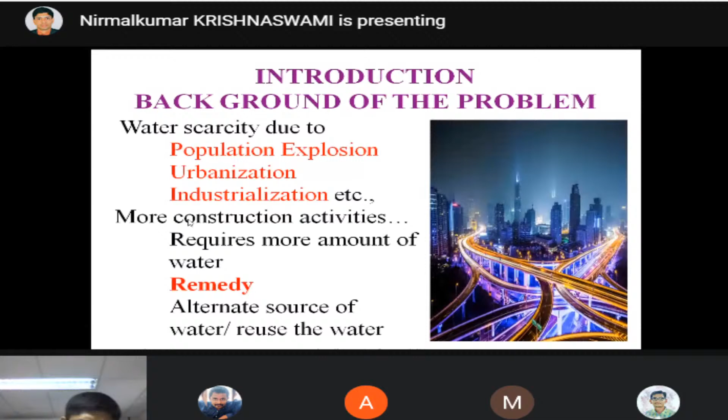So the only remedy is we have to go for reuse of water. For reuse of water, I considered various effluents: tannery effluent, textile effluent, effluent from rice mills, wastewater from milk industry, dairy industry, and wastewater from food industry.

I tried all this wastewater, and in our area, very near my place, that is Erode and Perundurai, we have more number of tannery and textile processing units. So it is easy for us to collect these effluents for our experimental research work. So I decided to collect the tannery and textile effluent from the nearby SIPCOT.

Those who know the geographical location of Erode will know the position of SIPCOT, which is very adjacent to our institute. In SIPCOT there are more tannery and textile processing units, so I decided to take the effluent coming out treated from the industry and use it for construction. This is the main reason I chose this tannery and textile effluent.

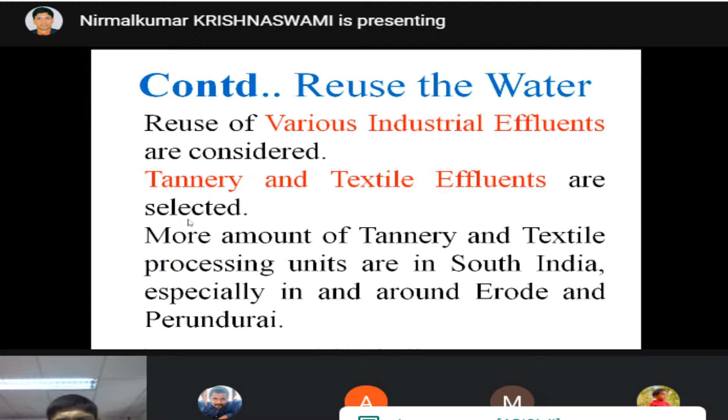Similar work was done by Marchand et al., Omar et al., then Woo-Yong Jung et al. — this third person, a Chinese researcher, worked on wastewater taken from the municipality. Then Olivier Poupard also used wastewater from the municipality. Omar et al., Saricimen et al., Al-Harthy et al. — these people, shown in violet color, used wastewater or waste coming from refineries.

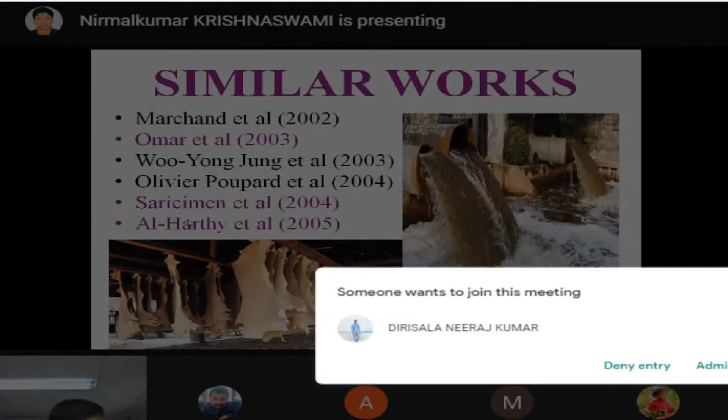These people belong to Saudi Arabia, and as you know, Saudi Arabia has more refineries. So they took the wastewater coming out of those refineries and used it for construction, and proved it to be successful. I did the same thing: instead of using potable water, I replaced it with tannery effluent and textile effluent. This is the background for why I chose the tannery and textile effluent.

Is my presentation normal, or am I too fast or too slow, Murthy? Sir, normal, sir. Normal. Can I proceed further? Yes, sir, you can proceed.

Somebody is saying the voice is not audible. Sometimes it will break, sir. Yeah, a few people said it's normal. Okay, I think I can proceed then. For most of the people, it is okay.

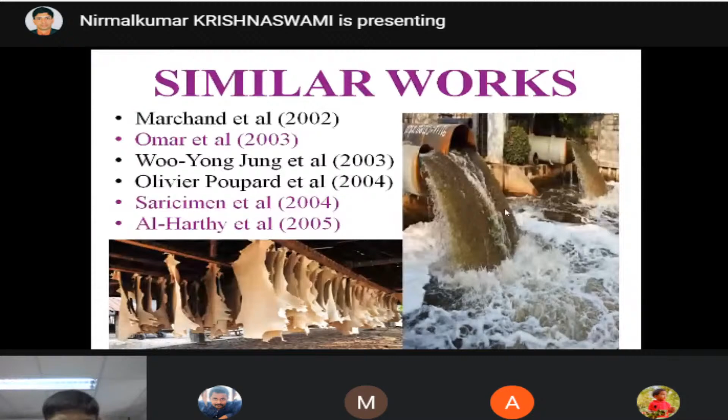This is the process I followed before carrying out the experiments, and this shows my methodology. I analyzed the characteristics of untreated and treated tannery effluent, and untreated and treated textile effluent. So four components are there: tannery effluent, two components, and textile effluent, two components. I studied the properties of concrete, both mechanical property as well as durability property.

If you see, mechanical property includes compressive strength, tensile strength, flexural strength; durability property includes sulfate attack, chloride attack, corrosion. I also studied a lot of other durability properties which will follow. Now, when doing this research, I faced a lot of problems. When compressive strength, tensile strength, flexural strength, bond strength experiments were carried out, mechanical property, absolutely there was no issue. But when coming to durability property—sulfate attack, corrosion, chloride—there were some issues. The weights were totally reduced and the strength was very, very less.

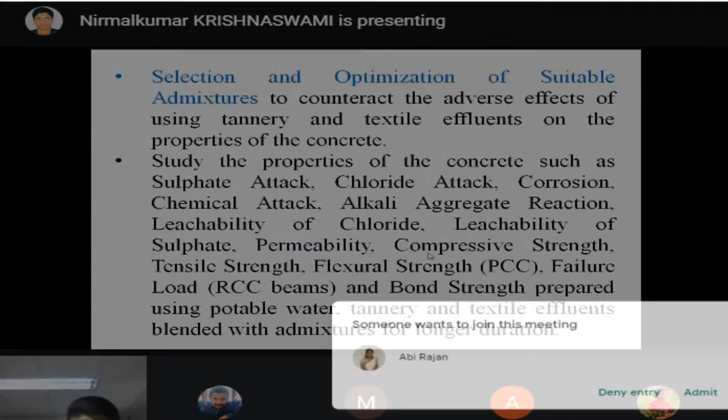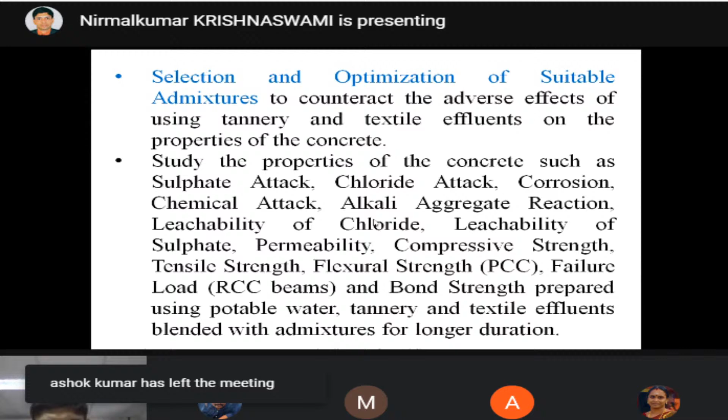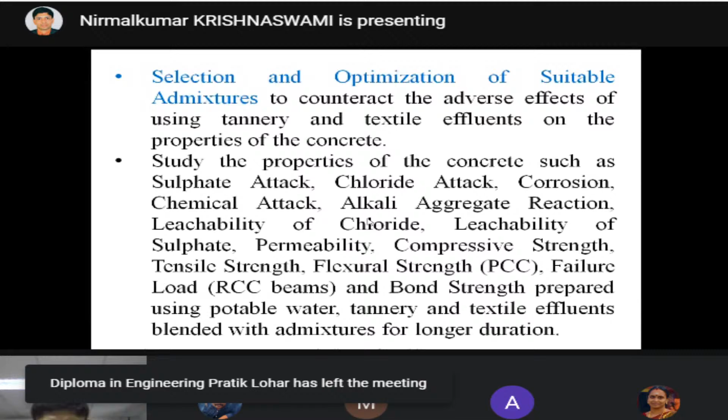So to counteract this, I used some chemicals, some admixtures. After adding the admixtures, I studied all the properties: sulfate attack, chloride attack, corrosion, chemical attack, alkali aggregate reaction, leachability of chloride and sulfate, permeability, compressive strength, tensile strength, etc. Around 13 to 14 experiments I carried out, and around 4,000 plus specimens I cast, broke and tested. I inferred a lot of information from these various tests.

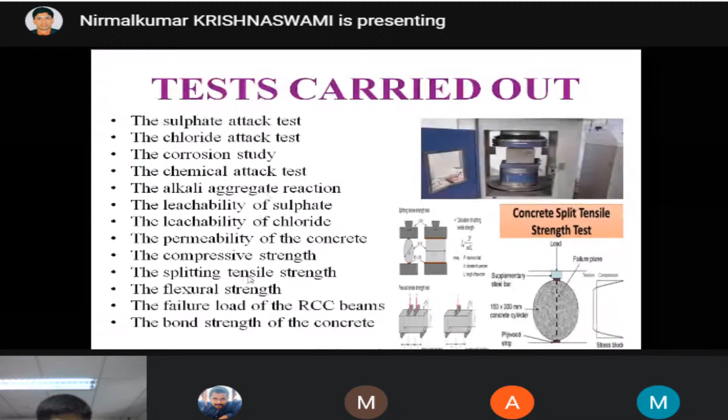Now, where did I collect all these effluents—tannery and textile effluents? I collected the tannery effluent from Meenakshi Leathers, SBMS Leathers, Taj Leathers, and the textile effluent from Thai International, KPR Textile Processors, etc. These are all the places where I collected the samples. I've also given this in pictorial form—these are all the various tests I carried out, around 13 tests.

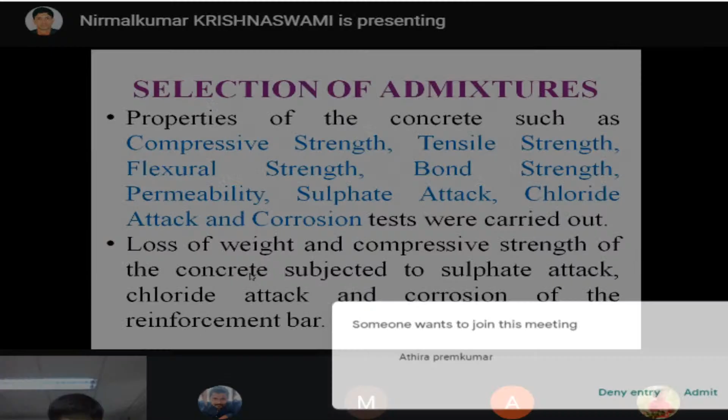Selection of admixtures for this particular area took around 6 to 9 months just to optimize, to select the admixtures and optimize the amount. While studying the properties, mechanical property had absolutely no issue. But when it comes to durability property—permeability, sulfate attack, chloride attack, corrosion—these play a major role, causing loss of weight and reduced compressive strength, and corrosion was aggravated.

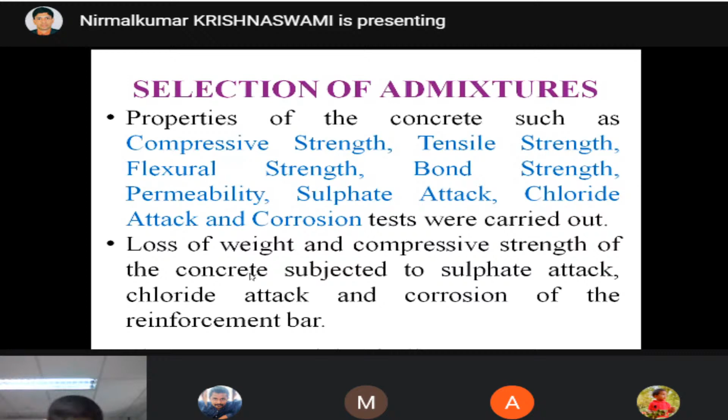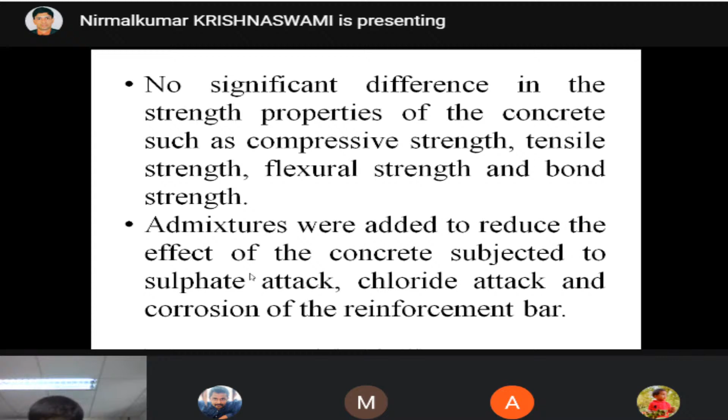So I selected the admixture and optimized it. There is no significant difference in the strength properties—compressive strength or flexural strength. But admixtures were added to reduce the effect on concrete subjected to sulfate attack, chloride attack and corrosion, and even acid attack is also subjected to some effects. For this, I carried out various trials—around 1,000 plus specimens for optimization, out of the total 4,000 plus specimens.

Finally, based on various trials and errors—not a single trial but around 40 to 44 trials—I decided and chosen: for tannery effluent, 5% fly ash with 2.5% Concar or 2% calcium nitrate. For textile effluent, it is 5% fly ash with 2% Concar or 2% calcium nitrate. So these are all the things I finally selected as the admixtures and the correct, right proportion.

After deciding this, I decided to prolong the test up to 2.5 years at various intervals: 28 days, 60 days, 90 days, 180 days, 365 days, 2 years, and 2.5 years.

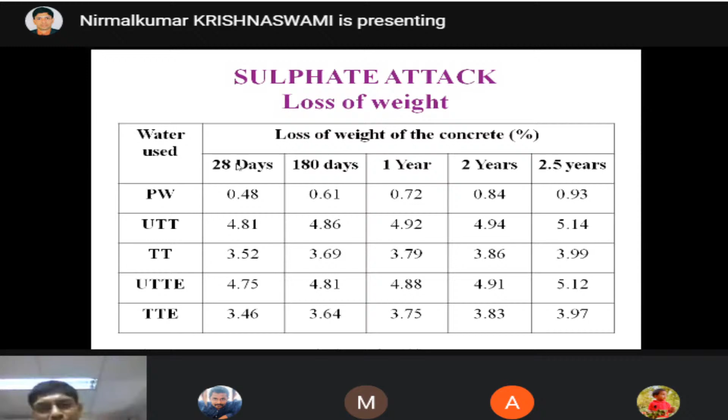Okay, now let us go to the chloride attack. Chloride attack, sodium chloride—I will be immersing the concrete cube in a 6% sodium chloride solution. After 28 days, I will take the cube, wipe it off and dry it, and then test it.

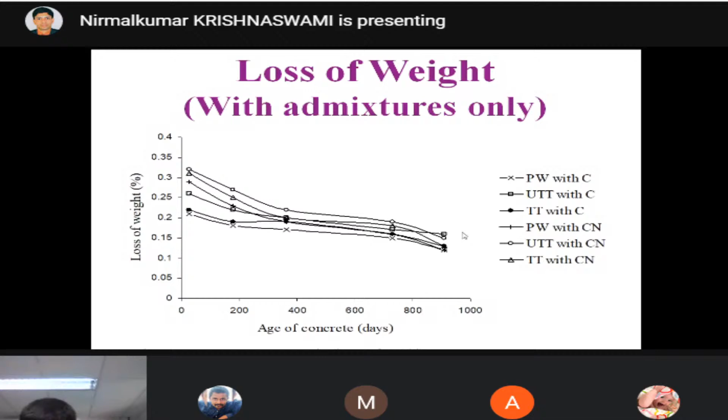If you see the graph for tannery effluent, it is less than 0.35 percentage. Even at the end of 2.5 years, it is further reduced to 0.2 percentage. This is particular for the tannery effluent.

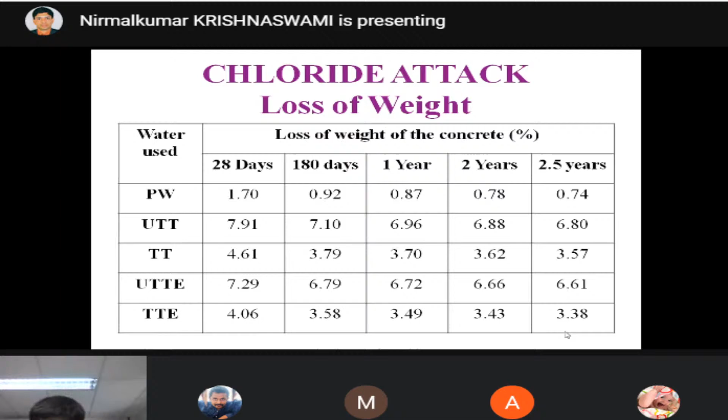Now this is for the textile effluent. In the table, textile effluent values are 7.29, 6.61, and 3.38. So for textile effluent, it is less than 0.3, even less than potable water.

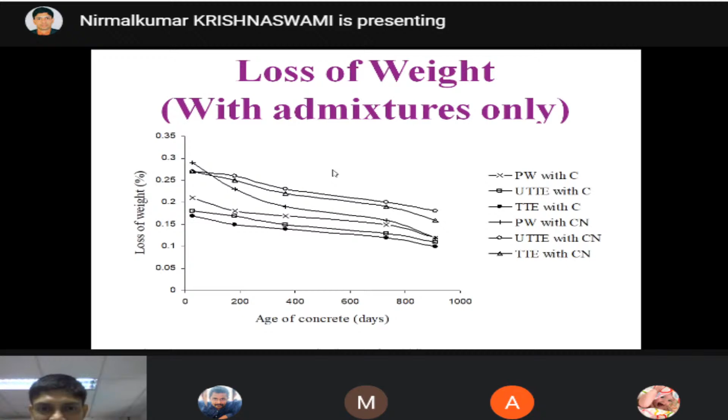This is as far as chloride attack is considered. After testing the loss of weight due to chloride attack, the same specimens were tested for compressive strength. So this compressive strength is our benchmark.

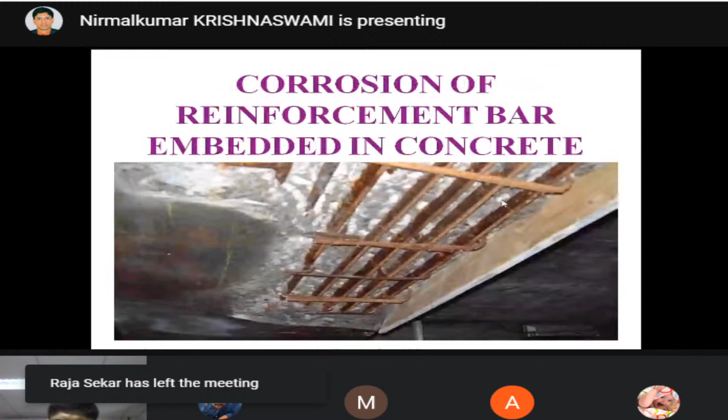Now let us go to the corrosion of reinforcement bar embedded in the concrete. What we did is we cast the lollipop test specimen for carrying out this corrosion study. We took a cylinder of 15 centimeter diameter and 30 centimeter height, and inserted a 20mm bar with a clear cover of 30mm at the bottom.

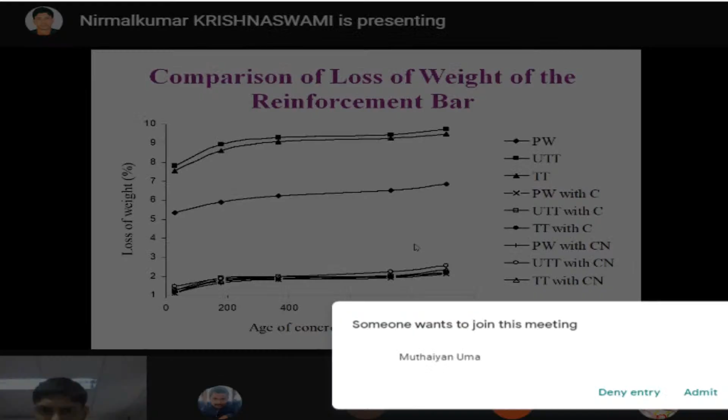We gave the cathode, passed the current, and measured it. At the end of 28 days, we stopped the experiment, broke the cylinder, took out the iron bar. We already knew its previous weight, then after 28 days we tested the weight again.

In the first weight, see the difference: without the addition of admixtures, it is around 10 percentage. Even when using potable water, since it is an induced corrosion, it is 6.2 percentage. But when we add the admixtures, the loss of weight is less than 3 percentage. So greatly it has been reduced by adding the admixture. The loss of weight is greatly reduced - this is a notable point.

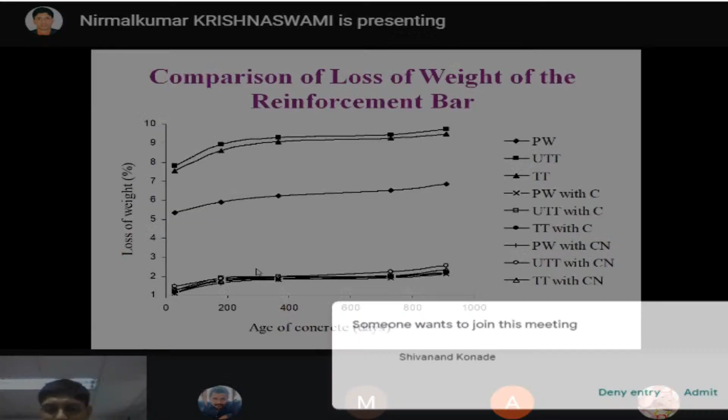Apart from this, these results are for tannery effluent and textile effluent. Here also there is a loss of weight, but even when we add the admixture, it has been greatly reduced.

Apart from this, I used Chempatch R coating - I coated the steel bar with Chempatch R. When the steel bar is coated with Chempatch R, even without any admixtures, the result is less than 0.3. But with the addition of admixture, the loss of weight becomes totally negligible, or I cannot say negligible, but it is less than 0.05 percentage. Just by coating this Chempatch R, total corrosion has been reduced.

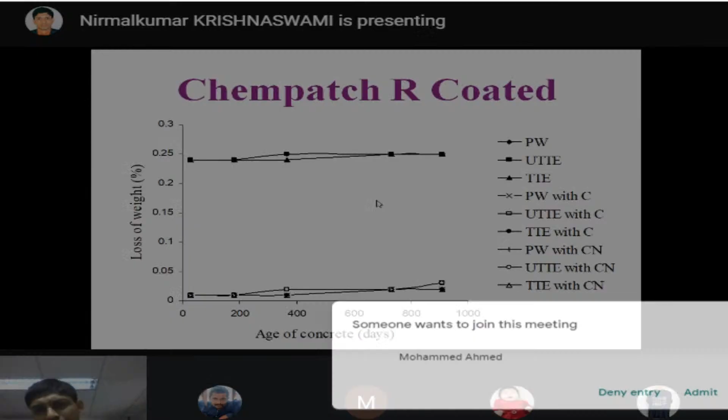This is for tannery effluent, and this graph shows the result for textile effluent. If we coat with Chempatch R, corrosion is totally reduced. Even if you are not adding the admixtures, just by coating this Chempatch R, the weight loss will be less than 0.3 percentage. But the only problem is that after 3 years or after 5 years, you will still be having corrosion. That is the reason we are adding the admixtures.

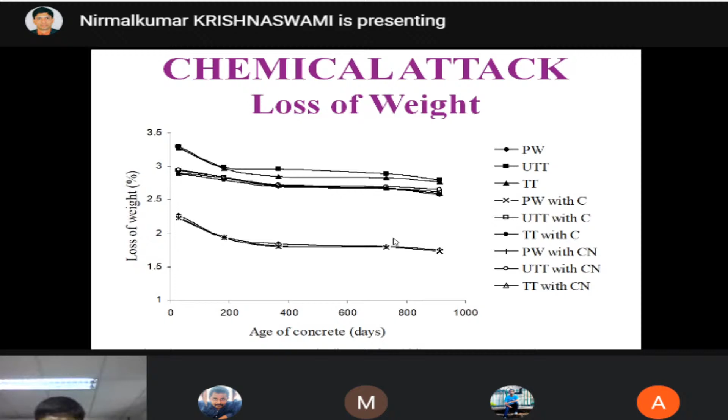Initially, without adding the admixture, it is reduced by 3.5 percentage, with the lowest around 3 percentage. But when we add the admixtures, it is totally reduced to 2 percentage. What you have to observe is that even by using potable water, you'll be having the same kind of adverse effect - you have to take this into account.

This one is for tannery effluent, and this one is for textile effluent.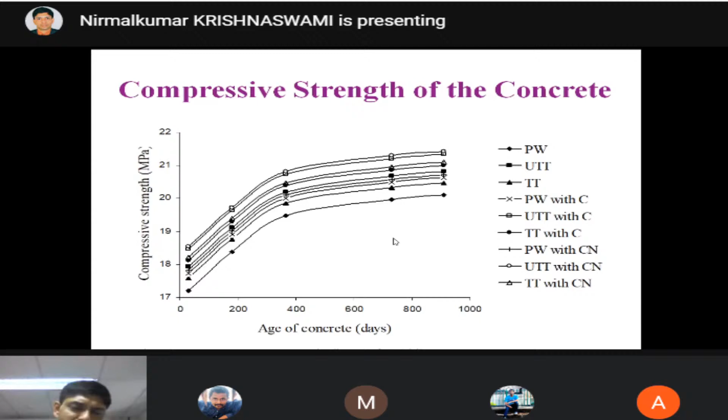Coming to the compressive strength, those particular cubes were checked for loss of weight due to acid attack, and also subjected to the compressive strength test. Initially, even for potable water, it is around 18 Newton or 19 MPa. When we add the admixtures, the compressive strength is increased and the loss of weight is decreased.

This is for tannery effluent and this is for textile effluent. So as far as this acid attack is considered, our achievable, required strength that we obtained is

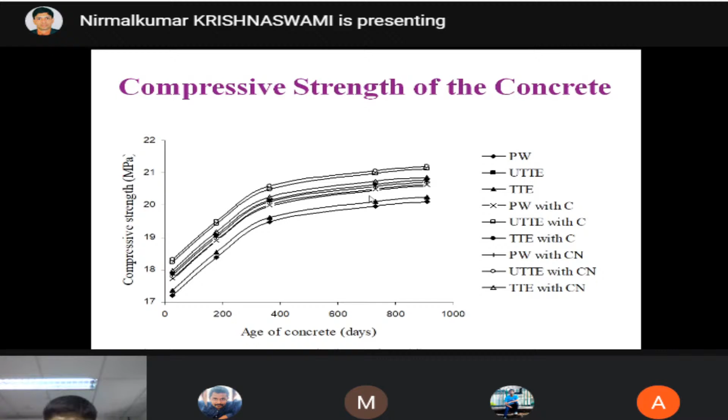at par with the potable water. Then alkali aggregate reaction, this is nothing but the expansion. There is no much difference, even without adding admixture or by adding the admixture. That is the reason I cannot give you the comparison.

This is without the admixture. This is for tannery effluent and this is for textile effluent.

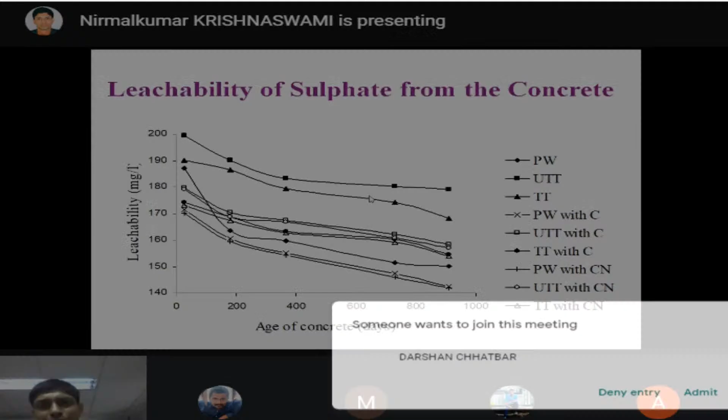Then leachability. Leachability is a very important environmental parameter. When we construct a building and it is subjected to rainfall, that rain will fall on the building and the water will get into the soil, which may affect the soil property. So for that, I carried out this leachability property.

Without adding admixtures, it is around 200 milligram per liter. But when admixtures are added, it is almost reduced to 180 milligram per liter. One more point to observe is that as the days increase, this leachability gets reduced. If we continue for 3, 4, 5 years, at one point we will be having a minimal leachability of 140 milligram per liter.

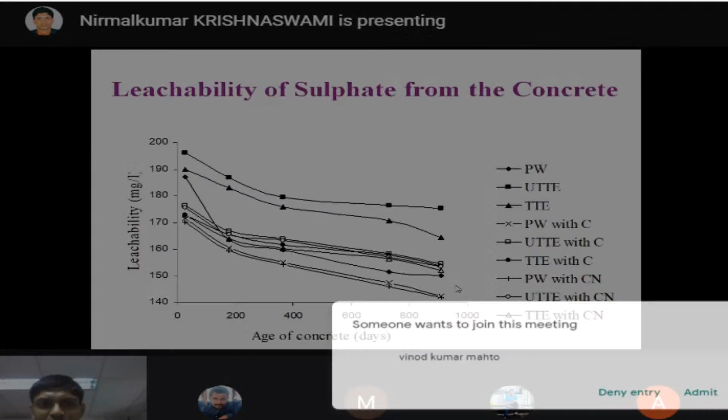This is for sulfate attack for concrete with tannery effluent, and this is for textile effluent, for concrete constructed using textile effluent. Here also, with textile effluent, when we add the admixture, it is less than 180 milligram per liter, and it gets reduced further as the age passes.

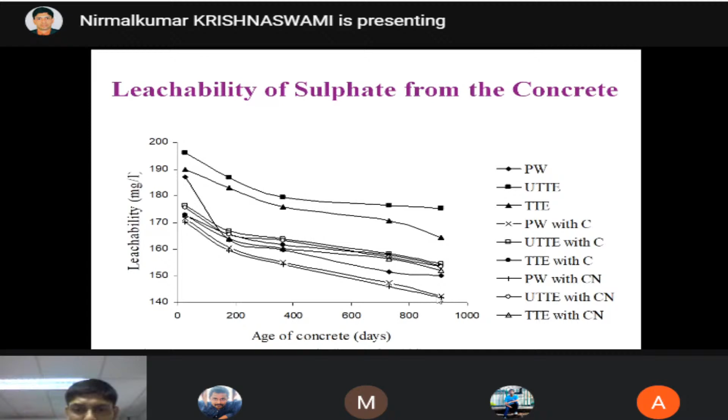As far as this is for the tannery effluent, when we add the admixtures, there is no much difference, unlike the significant difference we had seen in compressive strength or loss of weight due to corrosion. Here there is no significant effect. This is for textile effluent, and the previous one was for tannery effluent. Here also, almost the same property is observed.

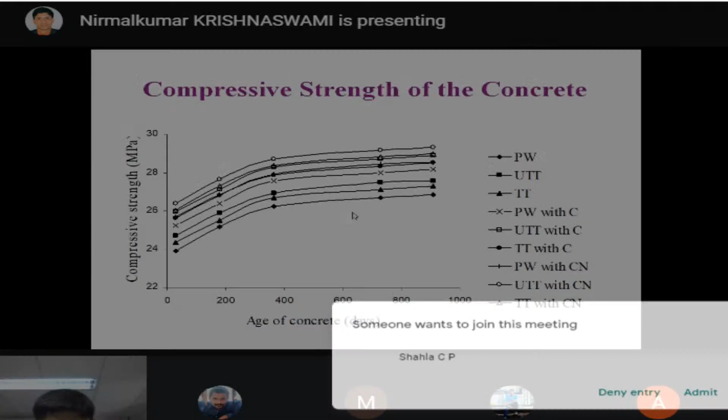So far I have discussed all the durability properties. Now I am going to discuss the mechanical properties. For mechanical properties, I used the universal testing machine. I casted 15 centimeter cubes and subjected them to various loads, broke them, and proceeded further.

So this is the compressive strength. Minimum it is 24 Newton per mm square. The grade of concrete I chose is only 20 grade, so no problem. Minimum is 24 and maximum is bumping up to 26. When we add the admixtures, it even goes more than 28. This is an encouraging factor as far as the compressive strength of concrete is determined.

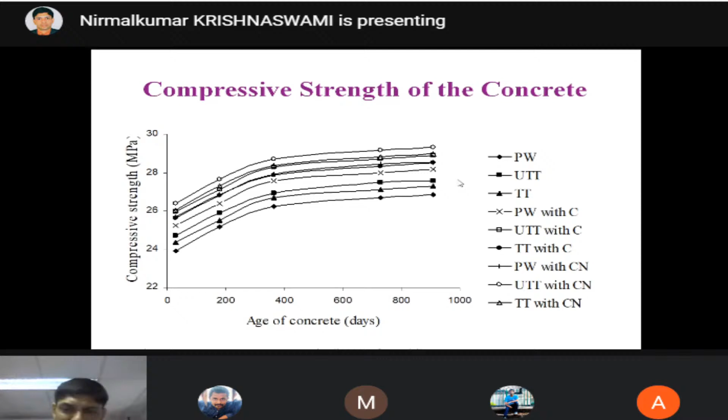This is for tannery effluent. The next slide shows the comparison for the textile effluent. Here also there is no much issue. So as far as compressive strength, that mechanical property, is considered, it is good.

Then let me go to the tensile strength. Once the compressive strength is good, obviously we will be having good tensile strength. But anyhow, I could not take a chance, so I determined it using the specimens. Here there is no much variation. The minimum is 2.2 Newton per mm square, going up to 2.7 Newton per mm square. Even with the addition of admixtures, it is not much variable.

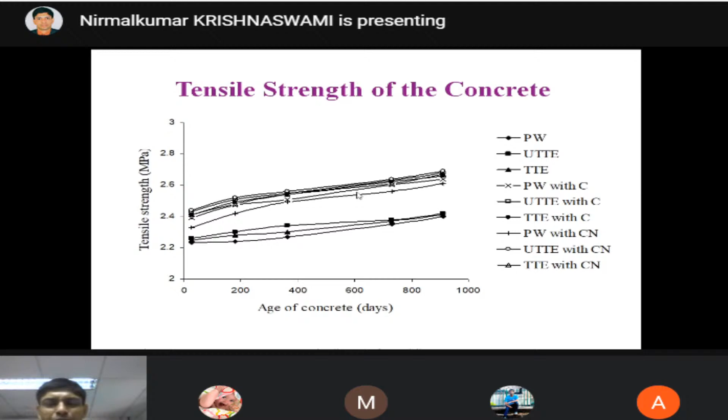This three line graph shows the tensile strength without admixture at various ages. Here, this shows the addition of admixture - these are all the trend patterns. Then coming to this, this is for tannery effluent and this is for textile effluent.

So in textile effluent, by using the textile effluent for concrete, there is no much adverse effect. Then coming to the flexural strength, I casted a 100 centimeter bar with 10 centimeter by 10 centimeter dimensions. Without using any RCC, I just used the PCC, and this is the flexural strength. Here I had used the admixture, but there is no adverse effect, so I have not given you the comparison.

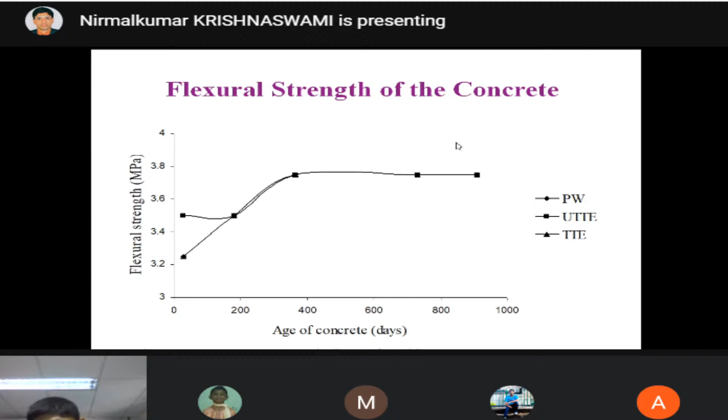Just you can see these three things: minimum 3.2 flexural strength and maximum it is 3.8 MPa. This is for tannery effluent and this is for textile effluent. So the flexural strength is very very good, there is no much issue in this flexural strength. All the three strengths - compressive, tensile, flexural - no problems.

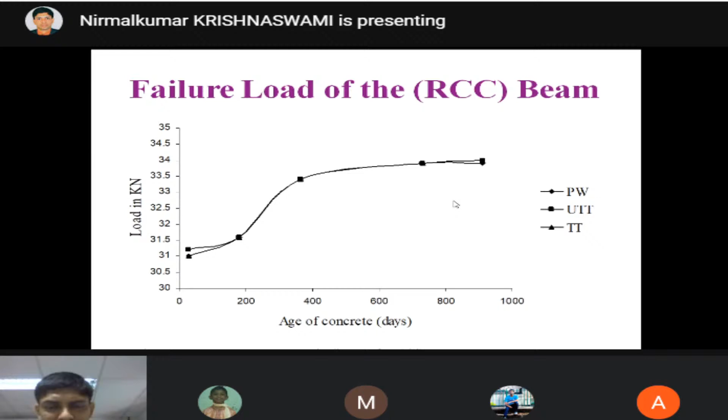Then this is the failure load of the RCC beam. I had cast a 1 meter beam with reinforcements, and here I see when there is a break in this concrete beam, it goes from 31 to maximum 34 kilonewton. So as far as the failure load of RCC beam, it is highly safe.

This is for tannery effluent, and the next one is for textile effluent. Then comes the bond strength of our concrete. Bond strength - I hope you know - we will be inserting a rod in the concrete cube and pulling it out to determine the strength.

So here bonding strength I received minimum 1.4 Newton per mm square and maximum 1.7 Newton per mm square, and this is our benchmark. The benchmark is around 1.7. So almost all the others, even with the addition of admixtures, there is no much effect - it varies from 1.4 to 1.7. So it's a good sign as far as the bond strength of the concrete is concerned.

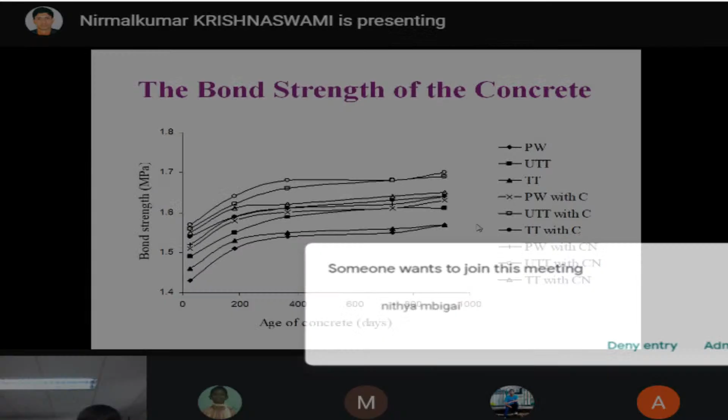So this is the bond strength of the concrete for specimens prepared using textile effluent. The previous one was for tannery effluent, this is for textile effluent. So almost the same behavior pattern is observed for the textile effluent as far as the bond strength of the concrete is concerned. So both are almost the same.

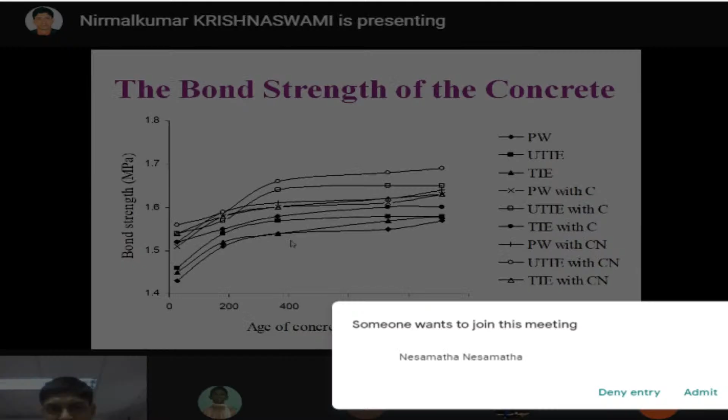So these are all the various experiments I have conducted to prove that tannery and textile effluent can be used for construction activity. Only drawback I faced is availability of the water, because the government is imposing a lot of restriction on taking water and using it in construction. But in the forthcoming days, when there is acute shortage of water, this is the one and only solution a government can find to counteract these effects.

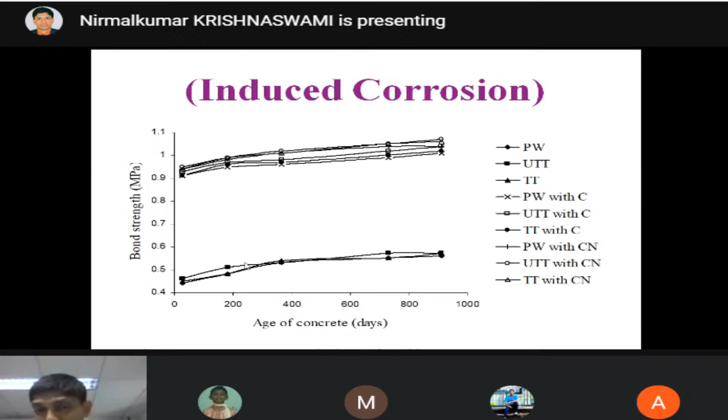As far as the cost benefit ratio is concerned, initial investment is high because of addition of admixtures and we have to transport the water. But when there is no water, there is no alternative - we have to go for this project, just as we are now replacing river sand with manufacturing sand and plastering sand. So in the forthcoming days, this may be a boon to people as far as water consumption, conservation, or water management is to be taken into consideration.

So let me conclude. It is concluded that the tannery and textile effluent can be used for construction purposes by adding 5%. This is the bottom line - you have to take this message: 5% fly ash with 2.5% concare or 2% calcium nitrate along with concrete prepared using tannery effluents.

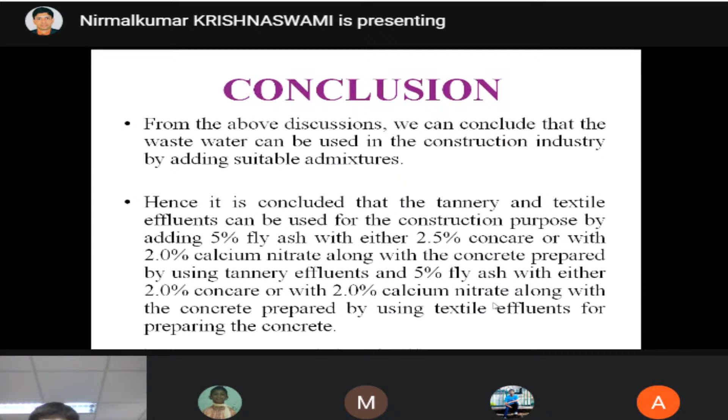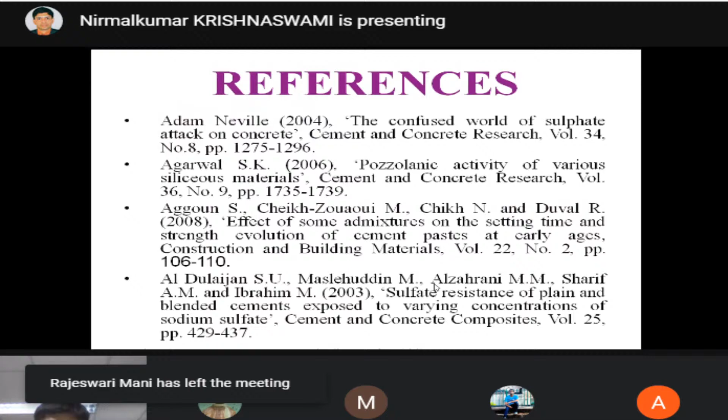And for textile effluent, it is 5% fly ash with 2% concare or 2% calcium nitrate. So this is our basic finding, and by using this we can easily counteract various adverse effects, and we can use the tannery and textile effluent for construction purposes. These are a few references. So with this, let me stop my presentation.

That's my end of the presentation. If you're having any doubt, you can ask me. Feel free to ask any doubts.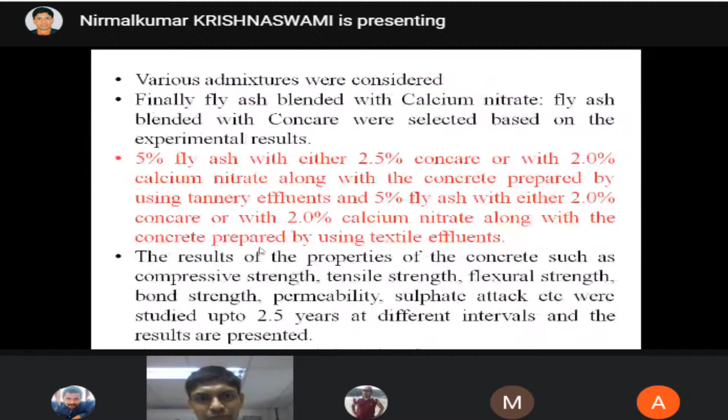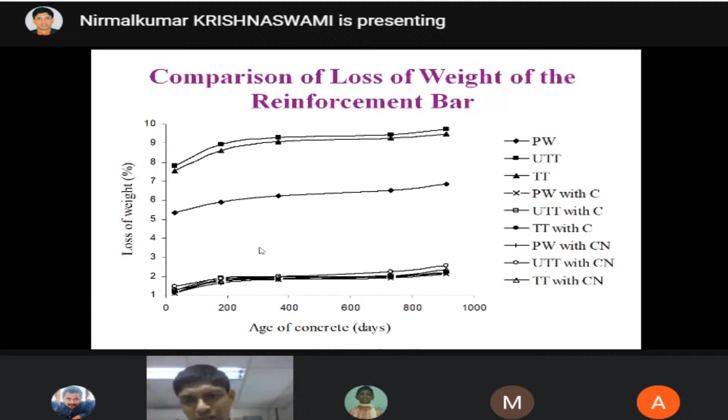Sudarshan, here is the answer for your question. We have studied the corrosion, and when we use the admixtures, this is the reduction in loss. When I coated with Chempatch R, you can see the result - an excellent result has been observed.

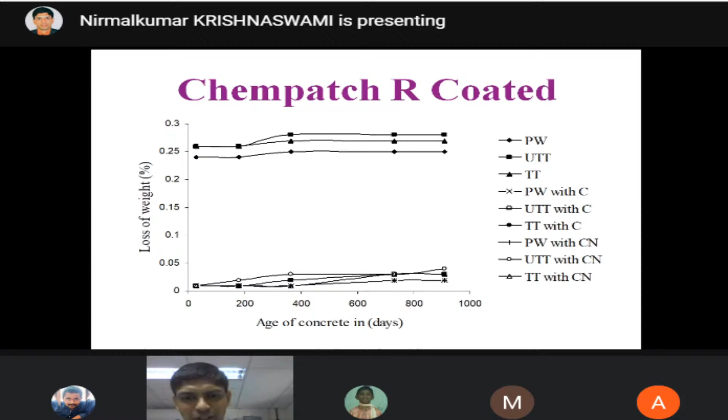Any other questions? Sir, is there any alteration needed in the nominal cover value? No, 30 mm is more than sufficient. Nominal cover of 30 mm is more than sufficient.